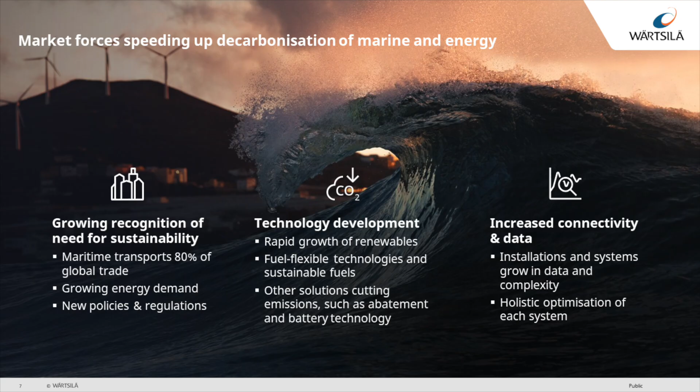There's a lot of visions about the decarbonisation of the future, both energy and marine. But we all know that in the marine segment, less than 1% of the fuel used is non-fossil. So we still have a stretch to go compared to, for example, power generation, windmills, etc. I think the world is over 30% now.

So that's one thing. Technology development is clearly on our agenda, and then connectivity, data, and how we can predict the maintenance need and service needs of our vessels. And this is fundamentally the steps we are taking.

At the very high end, we go into a sort of symbiosis with our customers, meaning that if we together with our customers succeed, then we also get something. If we do not, then we also get a slap on the fingers. So we need to succeed together with our customers.

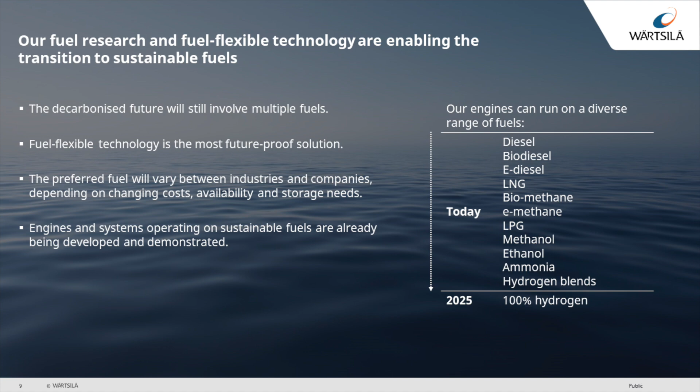About the fuels, yes, we've done a lot. We are still doing, and will continue. The list of today, I think there might be ethane missing, for example. But if I'm being a modest Finn and not bragging too much, everything that burns and burns well, we could do. The question is, of course, what are the consequences on the infrastructure, etc. And I think this is very topical as well, and hopefully tomorrow we'll get some insights into the port's view on that regarding ammonia or, for example, hydrogen infrastructure and the readiness of that.

Right, then we jump to the CHEK technologies. This is a summary of the technologies that we developed in CHEK together with our partners here.

So I'll end with the hydrogen engine concept. We have the automated route planning tool, which was mentioned already. Then we actually did an over-the-air software update.

So this we did as a real test. We connected - not to a vessel, but we connected over the air to our engine laboratory in Spain, Bermeo, and did this test. So we proved it can be done. For cybersecurity reasons, we do not do this sort of thing with our customers. The customers in question need to physically open a link before we could do this. So we are, in that sense, cyber secure.

As you might or might not know, or if you don't, you should know that the biggest cybersecurity threat is the human being. So how we act and how we follow the procedures. Hybrid and cold ironing, yes, done.

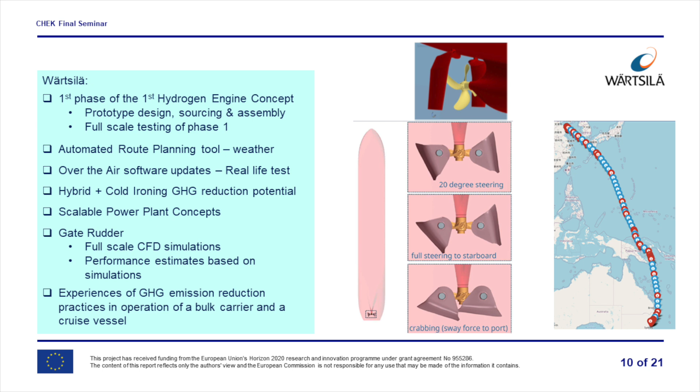And then the scalable power plants concept, which will come next. And also, of course, this then goes to the gate rudder. Wärtsilä in this consortium had two legal entities, so Wärtsilä Finland and Wärtsilä Netherlands. And Wärtsilä Netherlands did the gate rudder. And of course, we had linked parties as well - Wärtsilä Italy, Wärtsilä Norway. So we sort of have quite a broad participation here in this project.

And also we did this together with Lloyd's Register, as I remember, wasn't it?

Yes, these experiences. So not only going into the technology, but also the human side and behavioral aspect—how can your behavior actually impact greenhouse gas emissions? I think that's very important as well.

Right, so let's go to the main topic here, the scalable propulsion powertrain. This is what we did for the bulker in question, replacing—and if you wonder why we're in this and why we're together with, for example, wing sail technology providers, shouldn't that be a contradiction that an engine manufacturer is doing collaboration with a wing sail technology provider?

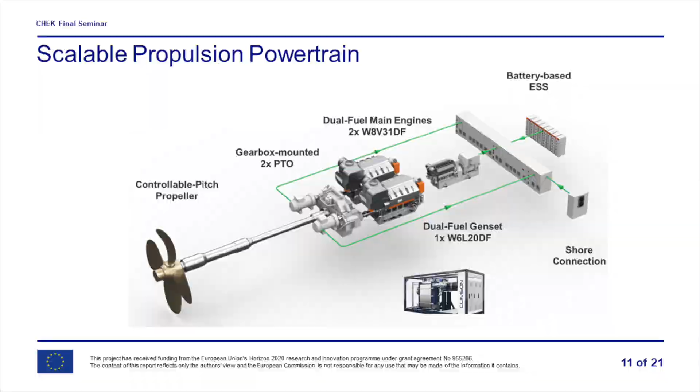Well, we don't do two-stroke engines, so we chucked out the two-stroke, put some wing sails on, and then we put in two four-strokes. So then we can enter segments which are not in our ball court, so to speak, today. So hence there always needs to be an interest in doing further business to join these kinds of projects.

But fundamentally, we have batteries, the cold ironing, and then of course also here the Climeon turbine to make electricity out of the waste heat recovery, two DF engines, auxiliary, and of course gearbox and PTO, PTI, and controllable pitch propeller.

This of course makes sense when we put wing sails on the vessel, because there is then a very variable need of engine propulsion power, and in order to be fully flexible, we need all these ingredients to get the best energy efficiency out of the vessel in question.

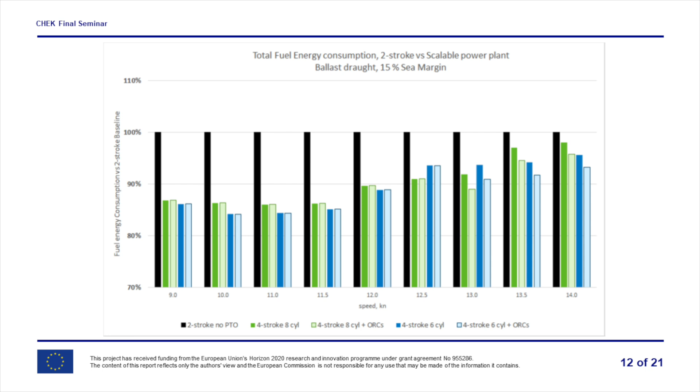Right, so this is without taking into account wing sails. This is just the powertrain compared to baseline, plotted against speed against the baseline two-stroke engine with fixed pitch propeller. So clearly you can see that the slower we go, and this is without any wing sails, the bigger the benefit of having our solution.

The reason being that at some stage you can shut down the other engine, run the remaining engine on a higher load, higher efficiency than the two-stroke, and hence you get the added value here.

So when you combine this with the controllable pitch and the wing sails, you can then of course use much less power than actually needed.

I think in one of the simulations that Deltamarin did with given wind and weather conditions, if this had a nominal power—was it 6 or 8 megawatts—at some favorable winds, the power need was 1 megawatt. So I mean, it's not a lot.

And then if you take in the possibility of even doing hybrid, if there are more sails or even more favorable winds, then this could really be something.

Same curve then, of course, when we are in scantling draft. And clearly, if we go to higher speeds, the traditional solution is better, of course, due to some of the losses that the gearbox etc. makes. But the flexibility shown here gives a better, wider operational profile.

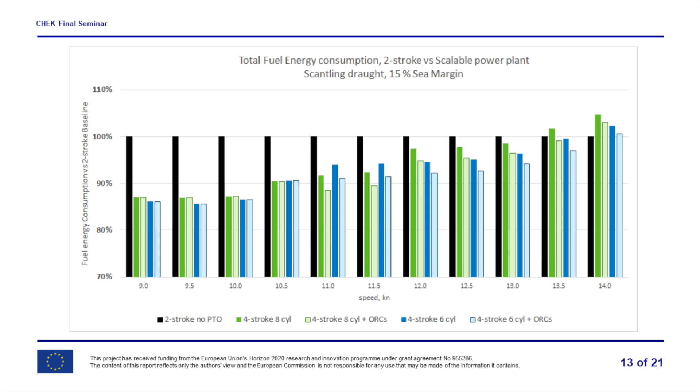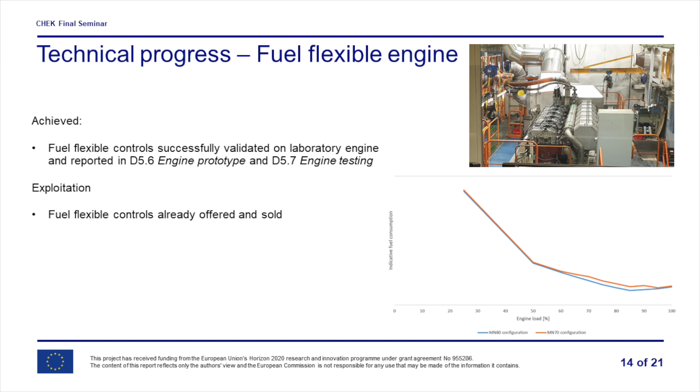Then I wanted to lift a couple of other things that we did, which will become of essence in the future. Fundamentally, as the fuel—in this case LNG or bio—and the methane number of the fuel, the purity if you may, changes depending on where you bunker, you might need to change the settings on the engine to optimize it for a lower methane number fuel. If you then run better fuel, you will not get the benefit.

But we made an actual change here. When we started this project, the idea was to have a gas analyzer after the tank to give indications to the engine, but we live and learn. Hence, we can, based on the combustion and the parameters we see in the combustion, deduce what level the fuel is and retune the engine to keep it optimized all the time.

Now you might think this is no biggie, but considering how much fuel the vessels use during a year, if you can take down a few percentage points, that's money in the bank.

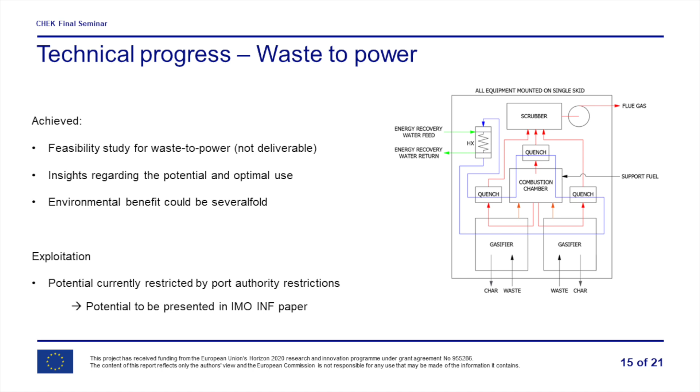And then I wanted to lift one more thing: waste to power. Even though it was a sort of feasibility study, this might also be interesting to discuss tomorrow with the synergy and these ports—that if you could burn the waste, this is for the cruise ship of course, as they accumulate a bit more waste than the bulker. If you could burn that and make it into energy, you could save up to 2.5%, which is not a small thing, and you would not have to pay the harbor operators for disposal of the waste.

That's of course good business, and hence that might be a bit of a contradiction with the harbor operators, and this is something to be lifted. And today it's not allowed, so this is also to be presented and lifted up to the INF paper we are writing, or WMW is writing, to IMO.

Even though Mia already mentioned this, I think this was a true collaboration in the sense that we opened up and could do this black box simulation, where we have our model and run that through Deltamarin's model, or they give input and we take that in and give output to them. Without going into each other's secrets, we can still exchange data. I think this is extraordinary and should not be forgotten, and I hope we can do these kinds of activities with other players, and other players can do this with us as well in the future.

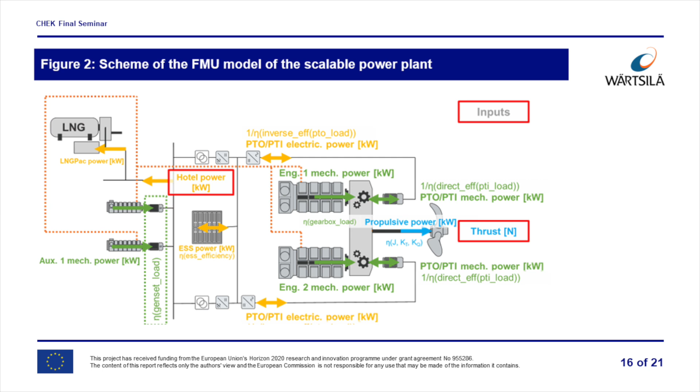Yes, and then before we jump into the hydrogen engine, interesting as such, it was mentioned earlier that we did not consider, at this stage, the tank capacity needed for hydrogen or other fuels as matters.

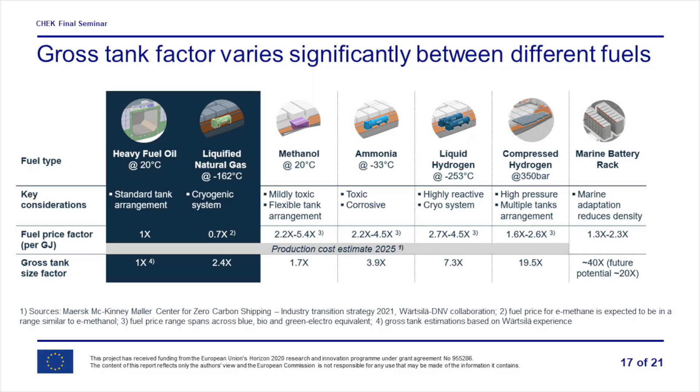If this hydrogen would be compressed to 350 bars, you need 20 times the size of the tank in order to get that, so that gives deep sea shipping a bit of a challenge. And even if you would liquefy it, you need almost more than 7 times the tank. So this could be for cruise, providing that the cruise liners or harbors have infrastructure, since they usually only run a day or two before reaching the next harbor, except for crossings. So in theory, hydrogen could be an option for cruise vessels in the future, providing there is infrastructure. Deep sea, of course, is a bit of a challenge.

Even though we would like to find a silver bullet here when it comes to future fuel, there is none yet, at least. Many of these fuels are not drop-in, so you can't mix them unless you have a dual fuel engine, with two different fuels going into the combustion chamber. But it's not only the engine, it's also the infrastructure on board.

Methanol you could put in steel tanks with some coating. Ammonia, no, you need stainless steel. So that's a bit of a challenge for retrofitting. And of course hydrogen has the nasty thing of escaping through impurities in the steel, but we believe that will be fixed in the future.

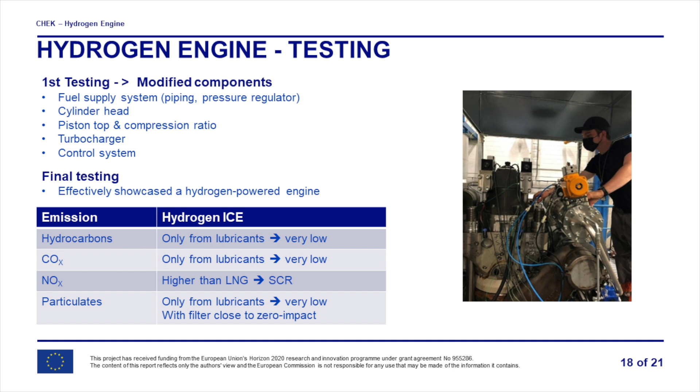Then a little bit about the hydrogen engine testing that we did. This was from day one. You could say the CHEK, Wärtsilä hydrogen engine was from day one a stepping stone, our first phase in this development, because we knew you do not develop such an engine in 3 years. You get a good start, which we did, but the data we gathered helped us simulate and give the numbers to Deltamarin for this future hydrogen engine simulation on the cruise ship.

As mentioned, there is very low, if any, emissions when you really scrutinize it. The only sort of bad things come out due to the lubricants, and we believe, or know, that NOx we can take care of with SCR, so that is not an issue. The tests were made on a 31 single-cylinder, full-scale engine in Vaasa, and we will release a small info video of that testing, which was witnessed by MSC, Lloyd's Register, and University of Vaasa last summer.

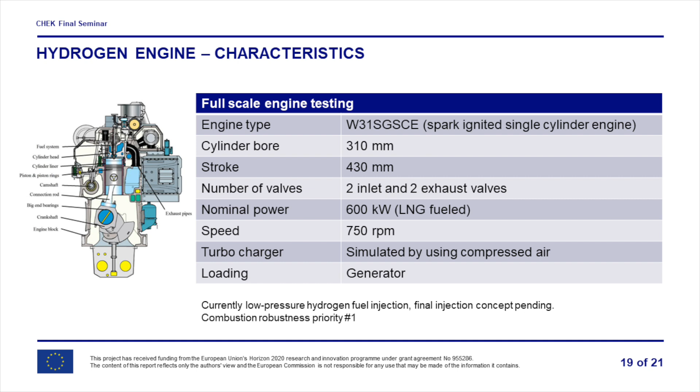This hydrogen engine journey of ours continues. By end of next year, we will have launched our first concept. We have promised the Finnish government that if a customer, and it's very close, would buy two hydrogen engines to run a balancing power plant in Finland—this is on our land-based power generation side, though the engine is more or less the same—we would be ready to deliver that by end of '27 and have it running. So this is how serious we are with hydrogen engines.

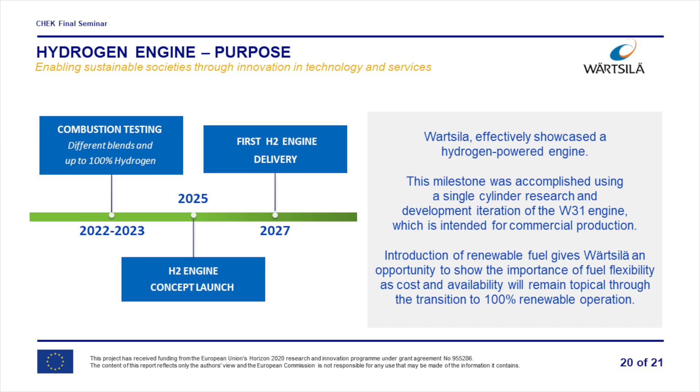I think this summarizes the feeling of the collaboration. Thank you to University of Vaasa—the coordination has been very hard, but meaningful and to the point. No, just kidding. And also WMW for the dissemination, and for the patience to keep us all in line and delivering the things we need to deliver. And of course, all the partners.

It's been a real pleasure. I think. Yeah, there's been pressure as well. Yeah. But luckily, we're still all on talking terms, and we answer each other's phone calls. So I think it's been a success.